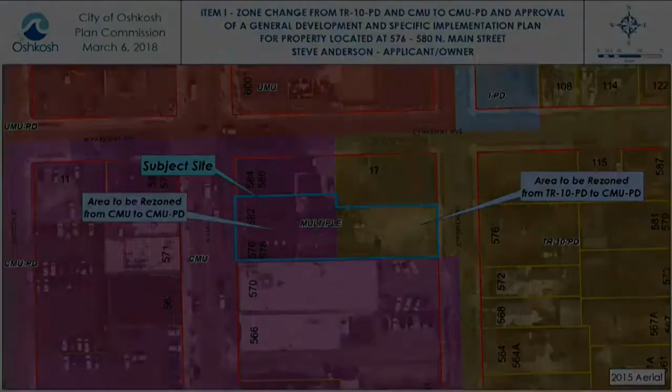Up on screen is an existing zoning map. Let me give you a little background information first. The subject property is about 1/3 of an acre in size, located mid-block of the 500 blocks of North Main Street and Jefferson Street. The property has double frontage on Main and Jefferson, and is approximately 60 feet south of East Parkway. The property is split zoned with TR10 PD and central mixed use, with TR10 on the east side and CMU on the west side.

The property contains two-story buildings which were built in the late 1800s and early 1900s. Moving on to the next slide. The buildings are currently used for commercial uses on the first floors, and office and storage spaces and two housing units on the second floors.

The east side of the lot is a gravelled area that fronts along Jefferson Street. The area was formerly the location of a two-family house which was razed in 1979, based on city records. No new use was ever established or approved by the city, so the property has been unofficially used as a gravel parking lot since at least 1994, the earliest digital aerial photography we have available.

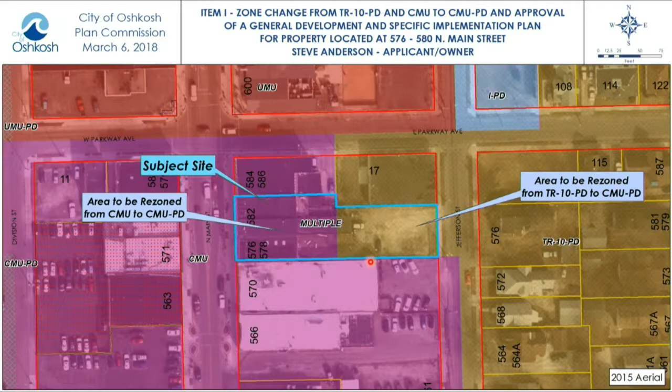The lot was to serve the two residential units, as well as provide parking for the commercial spaces fronting on North Main Street. At that time, the property consisted of 3 independent parcels, and as a condition of approval, the lots were combined into one, and that's how the split zone parcel came about. Usually that would have been caught at that time, but for whatever reason it was missed during review. Unfortunately, the parking lot was not constructed, and the property was sold to its current owner in late 2011.

Unfortunately, his plans never went forward with the development of the residential uses and the parking lot, so the gravel parking lot still remains as is, which is why the petitioner is coming back before us again today as a separate item, item 2. The applicant is applying for a certified survey map to split off the 578 building from the rest of the parcel, which will involve a subdivision variance, but I'll get into that a little later.

The parking lot is proposed to be a 16-stall parking lot with access off to Jefferson Street. It's going to serve the 2 existing residential units at 578 North Main, and accommodate spaces for the commercial units at the lower level of both buildings.

Lots are located with a 0-foot setback along the north and south lot lines, with parking stalls configured perpendicular to the lot lines. The petitioner is proposing a small amount of green space, about 10% of the lot area, here and alongside Jefferson Street.

The 4 westernmost stalls on the south side are going to be designated for the proposed lot for the CSM. Two parking spaces are required for the residential use, and two will be available for whatever commercial use is occurring on the first floor of that building.

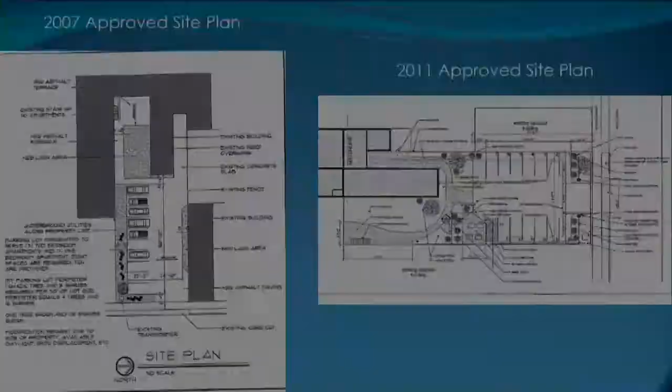The current access to the gravel lot off of Jefferson Street is located at the northeast corner of the property. Looking at the site plan, it's proposed to centrally locate that access with a 32-foot wide opening at the property line.

The design of the lot is constrained due to the narrowness of the lot. It's only 60 feet wide, so a number of base standard modifications are going to be required for this parking lot in order for it to be approved.

First, the proposed asphalt is going to have a 0-foot setback along the north and south property lines, where a 5-foot setback is required in the CMU district. So we are recommending approval of a 0-foot side yard setback for the parking area.

Another item that's just impractical for placement is a dedicated pedestrian walk leading from the building out to Jefferson Street. There's no practical location for that requirement, so staff is in support of another base standard modification for the elimination of that requirement.

Again, this relates to the 0-foot setback along the north and south lot lines, where normally perimeter parking lot landscaping would be required, but there's obviously no room, so staff is in support of a base standard modification for the elimination of the perimeter parking lot landscaping.

Another thing to note with the parking lot is the screening requirement. That's currently met with a 6-foot tall solid fence along the south lot line. To the north, there's an existing building fronting on Parkway Avenue with a 0-foot setback, which adequately screens the parking lot, so the screening requirement is met.

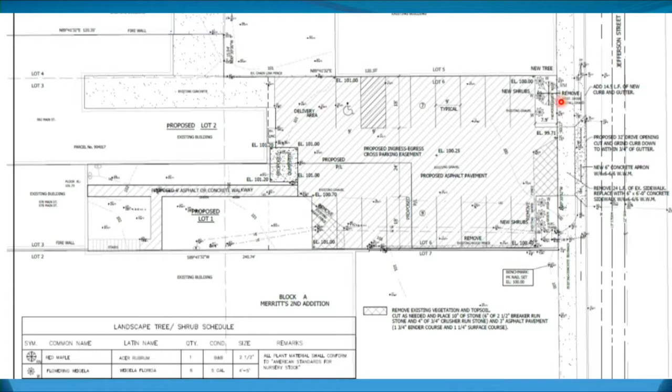As far as building elevations, no changes are being proposed for the building elevations. So with that, staff feels that the proposed plan development is compatible with the existing development surrounding the area, the Central Business District, and is recommending approval of the zone change and the GDP and SIP plans with a number of conditions.

We're recommending approval of the zone change from the TR10 PD and CMU to the CMU PD as requested. And then for item 2, this is the plan development amendment and the general development plan and specific implementation plan approval.

We are recommending approval with several conditions. Number one are the base standard modifications, which I described during the presentation. And then there are the other conditions that I mentioned throughout the report.

Approval of proposed certified survey map, the cross-access easement and shared parking facilities, and maintenance and management agreement for the shared dumpster enclosure. The parking lot shall include wheel stops for the northern row of parking stalls. Refuse enclosure material should match the existing perimeter fencing on-site. And then stormwater and grading plans be submitted and approved by the Department of Public Works.

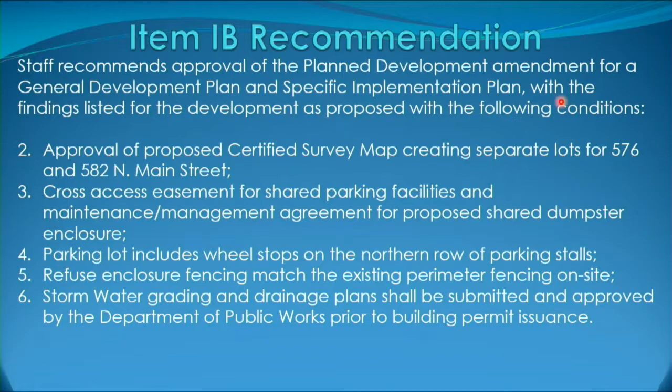All right, thank you, sir. Technical questions on that rather long item? Okay, seeing none. Anyone here from the audience to speak to this item today?

My name is Robert Tollefson. I'm an engineer with Harrison Associates. I'm here on behalf of Steve Anderson, who is the owner of the two parcels. He runs the tattoo company at 576 Main Street.

The reason we're here is because back in 2011 or whenever it was when Steve bought the property, he thought he'd be able to find tenants for the north building and be able to rent that out while he was running his tattoo shop. What he's finding out is it's a little more difficult than he had thought. He wants to get away from that and just concentrate on his tattoo business.

So he wants to sell the 582 parcel, and to be able to do that, he needs to do the certified survey map, which then led to the city staff requesting that we go through the rezoning because we had mixed zoning on there, and we want to get the one zoning, and then also going through the site plan process with the new parking and everything that's going to be for both those buildings. So that's basically why we're here, and they did a good job explaining all the different things that we need here.

So are you good with the conditions that were proposed? Yes, those are perfectly fine. Any questions for the petitioner as long as he's up? Thank you, sir.

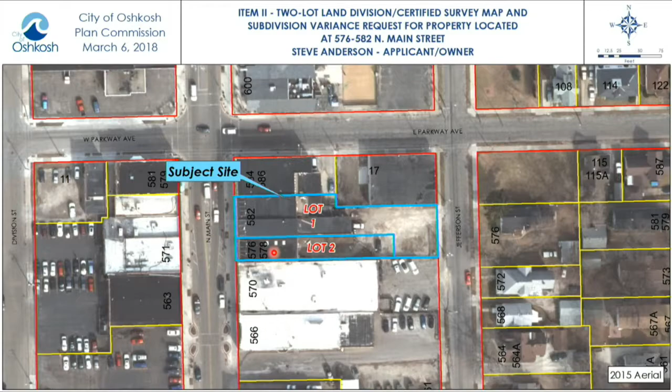So with that, staff is recommending approval of the proposed 2-lot CSM and subdivision regulations variance for the creation of a parcel width of 30 feet at the building setback line, with some conditions.

That the approved zone change to the subject site is made to CMUPD, which you recommended for approval in item 1. The owner shall provide verification that the common wall between 576 and 582 North Main Streets is fire rated, and that all public and private utilities shall be shown on the final certified survey map.

All right, thank you, sir. Technical questions from the commission? Seeing none, anyone here from the public to speak to this item today?

Robert Tollefson with Harrison Associates in Appleton. Basically, these parcels were separate parcels when the buildings were built. Don't know why they were combined, but now we're resplitting them so Steve can sell off the north lot here. I've looked at it, and there are firewalls between each of the building sections, so there's no issues with that.

And we verified with Public Works that there are separate sanitary and water laterals to each of the buildings, so there's no issues with that. We'll get the gas and electric easements put on the CSM, because basically they were shared between the 2 properties when they brought the service in, but those services were brought in when those were separate properties at that time. We'll get those put on, so we don't have any issues with any of the other stuff. I think we're good to go with it.

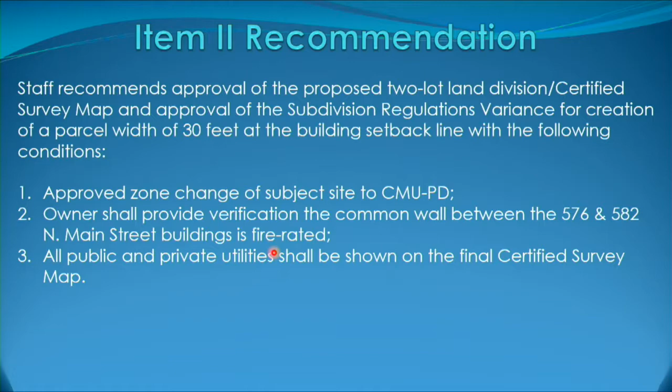Mr. Chair, the Assistant Director of Public Works, Steve Godey, asked me to modify condition number 3, or would you rather have it as a separate condition? It should be noted that if there is only one water service servicing both buildings, one of the buildings will have to acquire its own water service. That should be added as a condition.

All right, back to the commission for discussion. This is with that condition added, the modification of the third condition. All right, anything else? All right, call the roll.

Weigert, aye. Harry, aye. Mott, aye. Crop, aye. Bowen, aye. Cummings, aye. Ford, aye. Kiefer, aye. Wojtek, aye. Motion carried, 9-0.

Moving on to item number 3, a conditional use permit request for a personal storage facility at 538 West 11th Avenue. Thank you, Mr. Chairman. Welcome, sir.

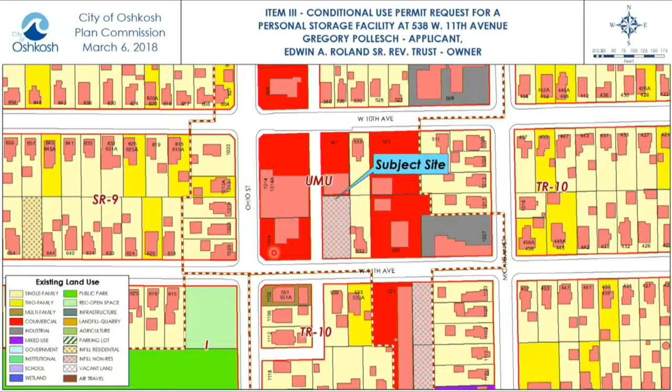Here's the subject site. It is a vacant parcel located on the north side of West 11th Avenue, about 150 feet east of Ohio Street. It is about a quarter acre in size, zoned urban mixed-use district, and the surrounding area is a mixture of commercial and residential uses. Here's an aerial view of the subject site.

The applicant is proposing a personal storage facility at the site. A personal storage facility is a conditional use in the UMU district. Staff believes the proposed use is compatible with existing uses in the area, and the facility is expected to generate very little traffic to the site.

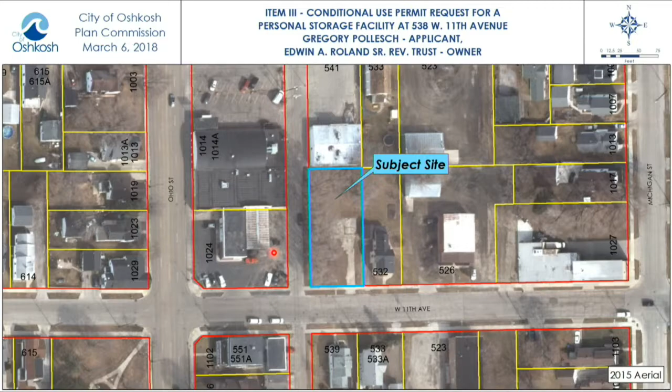Here is the site plan. The proposed building will be 46 feet by 42 feet in size. It will meet setbacks and impervious surface requirements for the UMU district. Access to the site will be a Class 2 entrance from West 11th Avenue. Vehicles will need to back into the street from the site, but that is permitted as West 11th Avenue is classified as a local street.

It is expected to have no employees, and therefore no designated parking areas are required. However, there will be driveway access to the garage door that will serve as short-term parking for customers. Lighting and signage plans were not submitted. Any future signage could be addressed under a separate permit, and lighting will be addressed during the site plan review process. The site plan shows a combination of new and existing trees and shrubs, and it will meet landscaping requirements for the site.

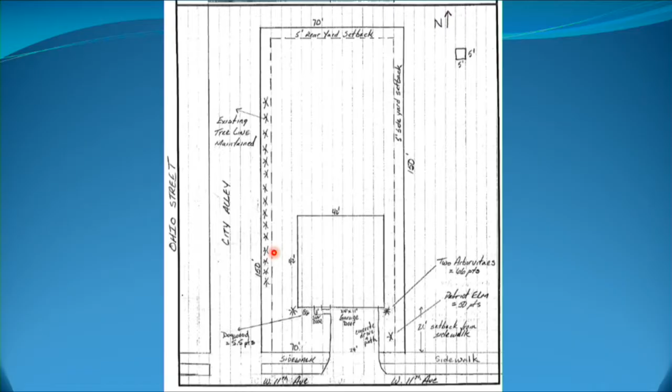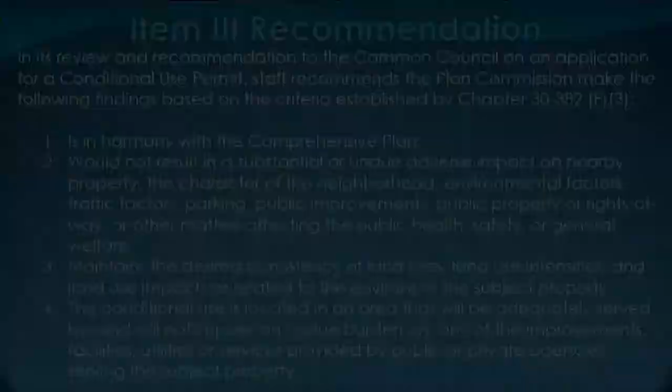All right, thank you. Technical questions from the commission? Seeing none, anyone here from the public to speak to this item today? Come on up, sir.

Greg Polash, 82 East Waka. I am the applicant, and I'm pretty much here to ask for your support, and if there's any questions, I'm happy to try and answer them. One comment: there's a reference to customers. I don't anticipate there being any customers, as we intend to use it for our personal storage needs.

Any questions from the commission? Go ahead, Kath. Will the back half of the property remain green? Yes, it currently is, and we'll maintain that. Any other questions for the commissioners? Thank you, sir. All right.

Anyone else here to speak to this item today? Come on up, ma'am. I'm here to speak on the property on 11th. I am so glad that the property has been taken. My name is Patricia A. Diener, and I talked to Ed Rowland, he's the owner. My address is 1316 Broad.

I did talk to Rowland today, and he informed me there has been some progress on it, and I told him I would come to the meeting to inform him on a few things. I'm very happy that the gentleman is going to take it. It was a toss-up between us or him, and I'm just happy the money came through so he could do it. And like the lady said in the back, is that going to be green? The whole yard is green. You've got about 2 feet from the building behind us, the laundromat, it's no longer a laundromat, and I think it'd be nice having a garage there. Okay, thank you very much, ma'am. Anyone else here to speak to this item today?

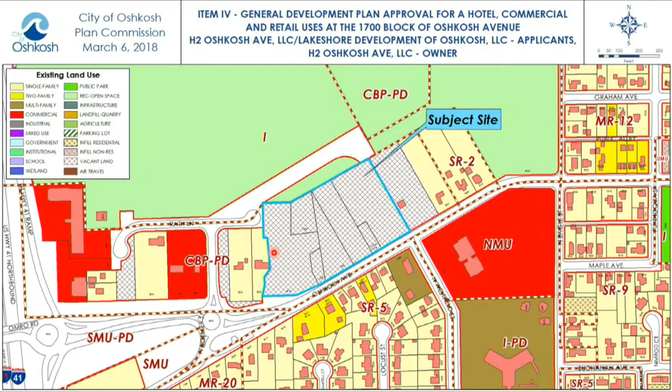Here's an area of the site. You can see we have kind of the old Robbins property, and then some of those sites have already been cleared of homes, and there are some existing homes that will be cleared as part of this project. Again, it's kind of lining up with the North Westfield Extended. This will be the section to the west side of it.

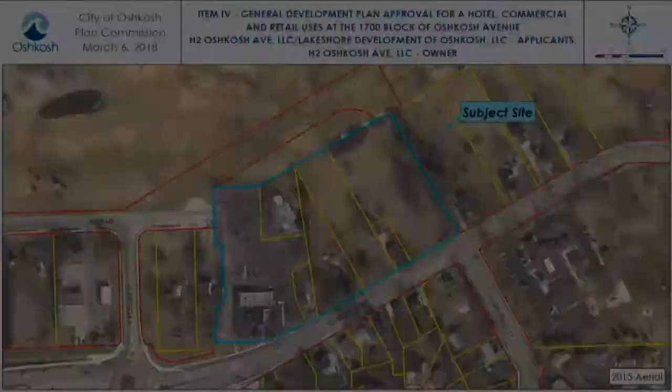So phase 1 of the development is considering a 2-lot CSM would be required. The proposed hotel lot would be subdivided off for the remainder of the retail commercial space. The applicant is proposing approximately a 112-room extended stay hotel. Staff is noticing that we will need to, during the SIP, take care of some cross-parking, cross-access, cross-signage easements, as it's intended to kind of function as a single development, even though it will be 2 parcels in nature.

Phase 2 is kind of indicated as right now approximately 5 retail buildings, showing a total of approximately 38,000 square feet. But again, this is just the conceptual GDP level. Those buildings' exact locations and types of uses could change, and they'll all have to come back through as SIPs.

The applicant is showing right now 2 access drives off of North Westfield, one servicing kind of the commercial on the front, and one servicing the hotel. Staff during the SIP will need to review the exact location of that southern access drive, as it may require an access control variance because it might not meet spacing requirements off of Oshkosh Avenue. But that final location will be done during the SIP, and we will handle it at that time.

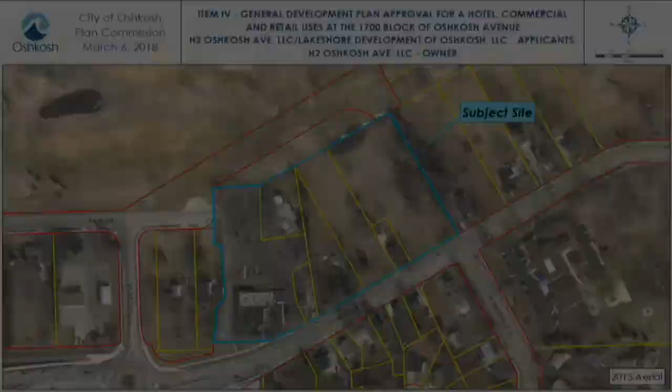The applicant is also indicating one off of the Koeller, or yet to be named, street extension. Right now that is actually shown as going through a city-owned parcel. During the CSM that created the Oshkosh Corp site and this Koeller Street extension right-of-way, an outlot was created that is still owned by the city. But we'll discuss that a little bit towards the end of this. Obviously that will have to be worked out with the city for that parcel if it is intended to go through it.

Right now the site plan indicates approximately 142 parking spaces. Staff has not run a parking calculation on the site yet because a lot of those uses are still in flux. As they SIP out the various segments of this, we will have to run each through the code. I can say right now it appears that the hotel site meets its requirement, which is per kind of the first phase of this development that you'll see as the SIP for the hotel in the future.

Again, staff is recommending that we will need some cross-access, cross-parking agreements, as this site is really functioning as a single parcel. Staff is going to recommend that there be a condition placed on it that the 2-lot CSM come forward first before we see any future developments. Also noting that there would be several base standard modifications that will need to be done as we do the SIPs, as there is quite a bit of pavement that is crossing what will be those internal property lines. So we'll have to handle some base standard modifications to take those pavement setback lines down to 0 between the retail lot and the hotel lot. But again, we'll handle that as part of the SIP process.

Stormwater management plans have not been submitted at this time. They do indicate a small conceptual stormwater management pond there. They have been in some discussions with Department of Public Works about the unique character of this area and how stormwater management is going to be handled. And I know we do have a meeting upcoming between Department of Public Works, ourselves, and the applicant's civil engineer to start to figure out exactly how stormwater is going to be handled for this area.

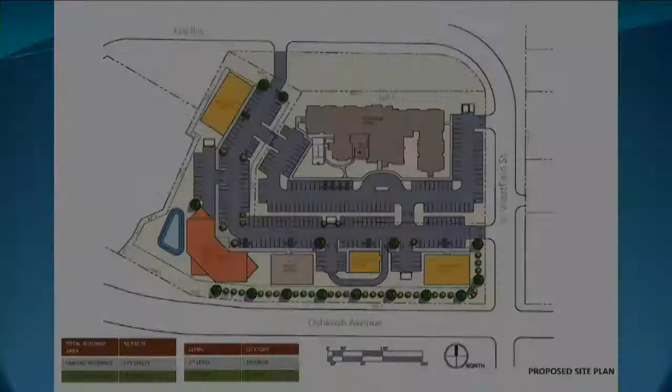Since the original plan was submitted, the TIA for Oshkosh Avenue has been finished, and Council has weighed in on what they'd like to see there. Previously, Oshkosh Avenue was a 66-foot wide right-of-way. The intent is for that to go up to 90 feet, so the city would be looking to acquire 24 additional feet of right-of-way along Oshkosh Avenue. In doing so, preliminary discussions have started about land swaps between the right-of-way needed for Oshkosh Avenue, the right-of-way needed for North Westfield Street, and that outlot shown earlier to the north side. Preliminary discussions are taking place about the applicant taking over that parcel and being made whole for the right-of-way being acquired.

This is a more recent site plan we've been provided with. Again, it's not the site plan we're technically reviewing as part of the GDP, but we wanted to make you aware that the applicant is working to massage the site a bit more as we move toward the SIP level. The hotel's been flipped 180 degrees, moved closer to both Koeller Street and Westfield Street. There are some consolidations of the buildings into fewer, larger buildings that would possibly be multi-tenant. Again, it's not the plan we're making a recommendation on today, but we wanted to keep you aware there will be additional processes coming forward, probably some land disposition if they acquire that other lot, and then the SIP for the hotel. That hotel SIP likely won't go forward until the land swap or whatever happens with that parcel is determined.

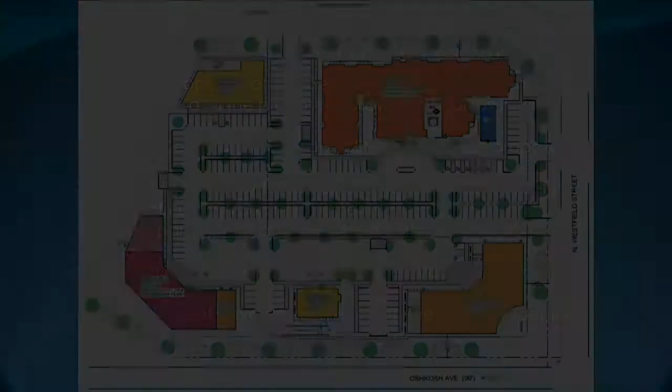So will we be doing another one? They'll be coming back for their SIP, so we'll kind of amend the GDP during the SIP process.

Staff is recommending approval of the general development plan with a couple of conditions: first, approval of a certified survey map showing that 2-lot configuration being proposed; dedication of the right-of-way for the North Westfield extension per Department of Public Works requirements; cross-access, parking, signage, and stormwater easements provided between the lots; a base standard modification to allow that joint freestanding signage concept even though it's 2 lots; and that the hotel lot shall not have independent freestanding signage.

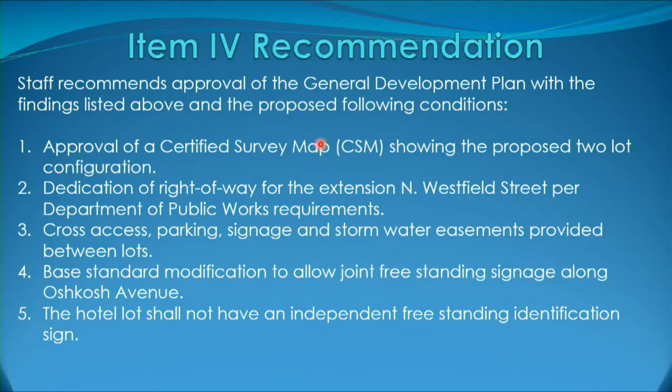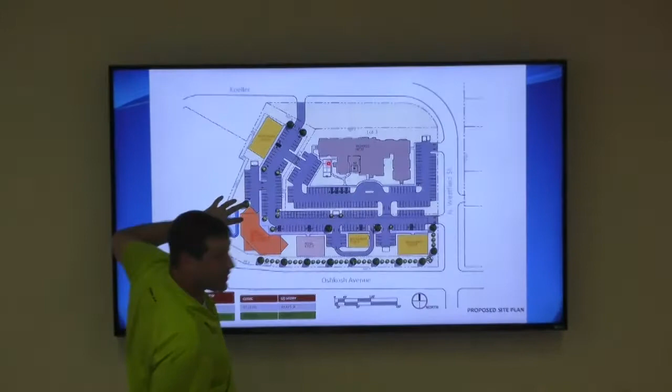Go back to the one that shows the lot lines. I found it very confusing between the 2 lots for the proposed development. Okay, so this would basically be 1 lot, and this would be the second lot. And that portion above is the city-owned property in question, created when the right-of-way in the CSM was done for North Koeller Street.

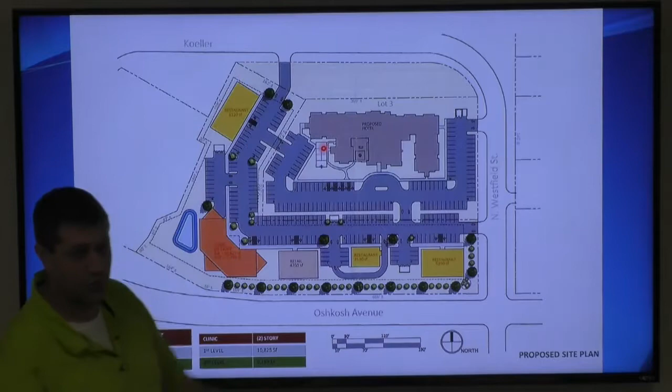I'm confused by the curve on North Westfield Street, in the upper right-hand corner. Was that something that was talked about last time? A little bit. If I can have Steve address that.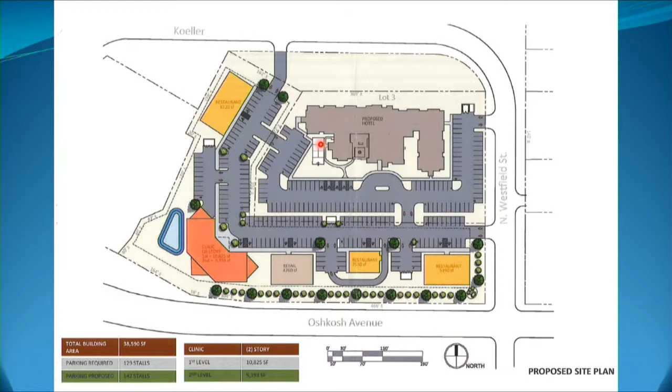If you could flip back to the diagram that shows the CSM, or the right-of-way. As you can see with the red lines near the top, the extension of Koeller Street as it comes to Westfield does have a radius on that corner. That is the intent of that road - it will be a radius, not a 90-degree turn. It will be a free-flowing turn, and Oshkosh Corporation will have a driveway off of that radius serving their parcel, so there's a distinction between the public street and the private entranceway, so vehicles heading eastbound on the extension of Koeller Street don't inadvertently enter the Oshkosh Corporation parcel thinking it's an extension of the street, at which point they'd have to try to turn around and exit that facility.

Okay, I didn't quite get all that because papers were coming through. Will this be talked about in the next item? We'll discuss it a little bit in the next item as well. As Steve said, the intent is to have a radius turn there, so Oshkosh Corp can have a driveway that comes in, so someone doesn't confuse it as part of the street.

If I'm summarizing that adequately, North Westfield as a public street will not go through all the way, closer to the lake? At this point in time, there is no intention to do that. There would be no issue - if the city should decide to do that at some point, the right-of-way would still be there. We didn't parallel the curve on the other side, so if the city at some point wanted to dedicate that and extend it, it could be done.

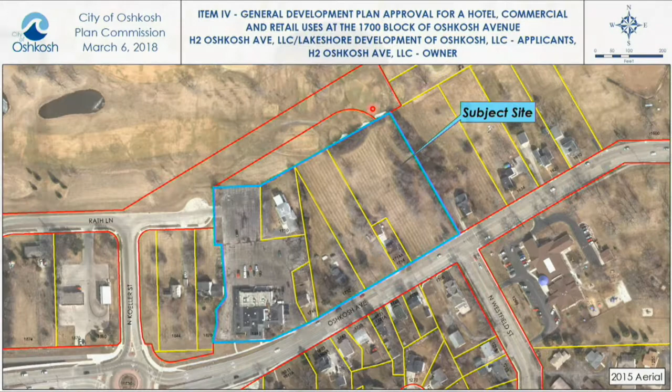One more question about the approximate acreage of the outlot, whatever that city-owned property area is, relative to whatever right-of-way on Oshkosh Ave. Want me to take that? The outlot's approximately 30,500 square feet. The total right-of-way that the city would need beyond what would be expected to be dedicated is in the 32 to 34,000 square foot range, if I remember correctly. So we'll still have a little bit of additional land that we may need to swap to make the developer whole.

Normally speaking, property owners dedicate right-of-way up to what's required. In this case, we're requiring above and beyond what would normally be expected of a developer to dedicate. Okay, all right, thank you.

So the GDP, if it's gonna be modified, I assume the reason we're passing it as is today is because of a timeline issue? It's partially the timeline and partially because there are a lot of things that will come forward in the future, and we're gonna be SIPing this kind of one step at a time. This lays the groundwork so they can start to do those finalized plans. Fair enough. Other technical questions?

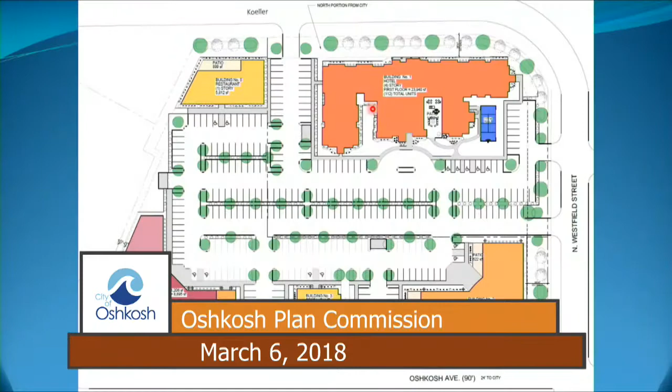Location of the detention basin, on the revised figure? Again, they don't have one shown. They're looking at maybe some options - Steve is here, there's still a lot of stuff up in the air of how that is going to be done. They may be looking at some within the parking lot. The city is considering, and Steve is looking at some regional stormwater management options here - a full stormwater pond, as you traditionally see in maybe a single lot development, is probably not going to be needed. As the TIF was proposed and approved, it requires these developments to manage their water quality element only, and the city will be taking care of the water quantity element at a different location, either by direct piping it out or a detention basin.

This is something else that, as we unfold this, is one of the things we kind of had to address. We had to wait for the TIA to finish to make some of those determinations of what was going to need to be done. Now that that's been done, the developers can start finalizing those plans of how it's going to take place.

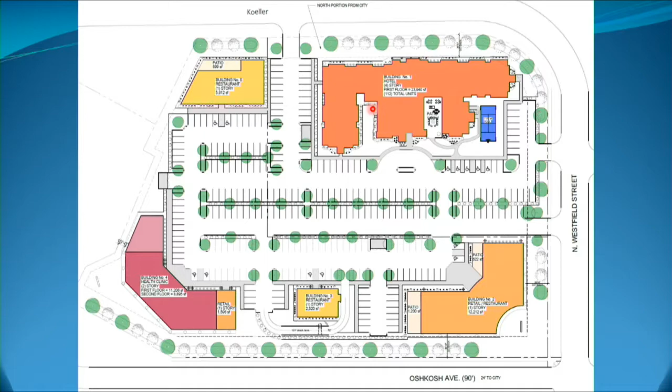Other technical questions? Mayor Cummings? Just one question, assuming North Westfield will continue to be the entrance to Oshkosh Corp, has anyone talked to Oshkosh Corp about signage needs on that northwest corner?

I think actually Oshkosh Corp's primary entrance is going to be the roundabout over at Koeller that will be extending up. They envision that, and we'll talk about it when we get to the Oshkosh Corp site. Their employee numbers show that the majority of their traffic is going to be coming off of 41, likely going through the roundabout, the North Koeller extension, and into their property.

Other technical questions? Excellent. Anyone here from the public to speak to this item today? Come on up, Steve.

Steve Hoopman, 5105 Iameda. We're the property developer, and Ben Ganther is with me from Ganther Construction, who has a rendering of what the hotel as proposed kind of would look like. So we're here to answer any of your questions.

The handouts I did give you show some additional commercial buildings, and those are just kind of concepts of what the front buildings could look like. It's all up in the air at this point, depending on who ends up in there and if we end up with a clinic or not, and the type of fast food locations that might go in there.

So the big thing is getting the hotel under construction and getting it to a point where we can get the SIP ready to submit within the next 30 days or so, which would have the stormwater management plan along with it.

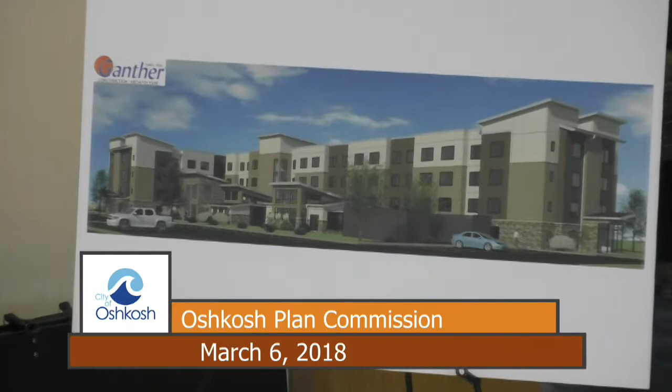So this is their 8th or 9th generation of the Marriott Residence Inn. There are a number of them that exist throughout the country, and we've just kind of modified and tweaked it a little bit to meet the new building requirements.

It definitely adds at least $500,000, if not more, in cost to the project, making it 75% Class 1 material. Instead of, on the top part, doing an EIFS, which is a cement board, we're having to bring the brick up further up the sides, and some stone on the front, and then some brick.

But this kind of creates a little bit of a problem, because at the main entrance the brick doesn't actually start till the second floor, where normally it would be EIFS. But with brick starting on the second floor, we're gonna have to do some additional steel work with posts and beams to support the weight of the brick and so forth.

So the building requirements definitely do add to the cost. On a single story or story and a half building, it's not as bad, because you're not dealing with as much vertical height, but in this particular case it does. This one, I believe, shows pretty much 75% on the 360 design.

So I don't know if there are any questions or not, but the top material here is a product by a company called Allura. It is a cement panel that rests between extruded aluminum strips that create that rustification strip that you see segmenting that upper material.

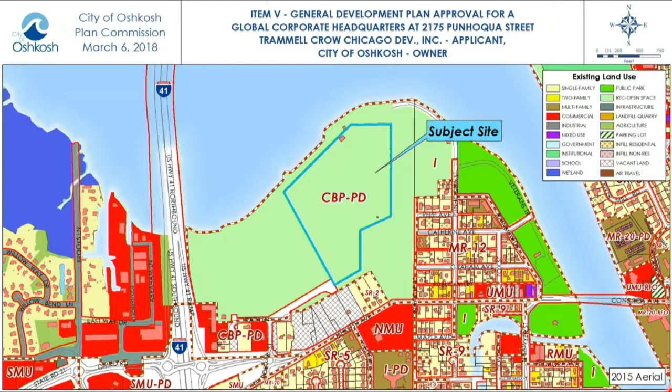Here we have the aerial showing the area that has been subdivided out through CSM for the Oshkosh Corp Global Headquarters. It has approximately an 80-foot wide right-of-way strip along the new North Westfield, North Koeller extended intersection. Oshkosh Corporation is intending to construct an approximately 189,000 square foot global headquarters, which would employ possibly up to 650 people on the location. The building is a mixture of office space, conference room, atrium, training center, some cafes - a lot of amenities they're trying to add for their employees - as well as the associated surface parking lot.

Here's the rough landscape plan. Right now they are looking at just one main entrance along the northwest field, North Kohler Street extended. It's approximately a 39-foot wide driveway, which will include one drive lane entrance in and two drive lanes on the way out. Here you can see the large, approximately 650 parking space parking lot intended for the site.

Moving through, here's a rough signage plan. Obviously this will require a SIP as well, but they're indicating wall signage on the north and south sides of the building. That sign area right now, they're reserving approximately 416 square feet of space for each of those signs.

Final signage plans have not been determined, so they're just trying to throw some placeholders out there. On the north side of the building, we have about 432 linear feet of building, so their maximum allowed signage is 432 square feet. So the 416 square feet they show, which is just a large box, would be appropriate. On the south elevation of the building, they only have about 328 feet of building frontage, so that sign will either need to be scaled back to meet the maximum sign requirement, or they could seek a base standard modification once final signage plans are made.

They are indicating 5 outdoor display areas on the site. Now, when the Corporate Business Park Zoning District was established, outdoor display is not permitted, so they will need to do a base standard modification for their vehicle display areas.

In your staff report, they did outline 6 points about the intended use of how they want to do this. Instead of reading them one by one, I'll let you look through them, but just to highlight briefly, these are intended to have vehicles come and go, not be permanent outdoor displays. If they have a vehicle, they may display it for a while — if there's a certain client coming into town that might purchase that type of vehicle, they may have that out there for a little while.

They're intended to be landscaped, formed features — not your outdoor display like you see at a gas station. These are intended to be vehicle display areas, maybe 1 or 2 vehicles at a time on each of these sites. The final details are still being worked out exactly how they want to use them, but they're looking at grasscrete, so these aren't going to be large concrete areas where they just park a vehicle. The intention is for them to look blended into the site, and there would obviously be no retail sales — these would just be vehicles they're displaying that are products they make.

So staff is generally supportive of that base standard modification, but we'll handle it during the SIP once the final details are worked out of exactly how they intend to use these areas.

In terms of landscaping, we have a very large site with a lot of landscaping requirements. The applicant is still finalizing those plans, but they've indicated three areas where base standard modifications may be sought at the SIP level.

The first is the primary entrance to the building. Our landscaping code requires that 50% of all landscaping points be placed on the primary building facade—in this case, the south facade. The applicant has a large plaza area and landform features where they want to use the vehicle display, and they can't achieve 50% of their points along that facade because it's taking up other elements. They still intend to meet the full requirement of points, but would seek a base standard modification to move those bushes around the rest of the building and landscape in front where they can. That'll be handled at SIP, but they've indicated this is one area where they may not meet the code for location.

The second is our yard landscaping requirement. In the new code, 50% of yard landscaping must be along street frontage. In this case, based on the size of the development, they're required to have 3,800 points of yard landscaping, but they only have an 80-foot wide strip of actual street frontage, primarily made up of that drive entrance. It's hard to fit 1,900 points—half of the total—into that little area. So they want to meet the yard landscaping requirement in total points, but given the unique configuration of the lot, it's not feasible to put it all in that area, so they want to spread it out more throughout the site.

Finally, we'll move forward here. Conceptual building elevations have been provided, and they're actually pretty close to having those finalized.

Here's where I talked about the signage—right now they just have placeholders on the building as those sign plans are finalized. At the time the GDP submittal was done, they were at 74.2% of Class 1 materials, just below the 75% requirement. We've talked with the applicant, and they will get that up to 75% by SIP. They've made those submittals—I haven't had time to review the documents, but I know they've indicated they'll meet that 75% requirement of Class 1 materials on all four sides of the building.

And here you can kind of see rough examples of what they're looking at for their vehicle display.

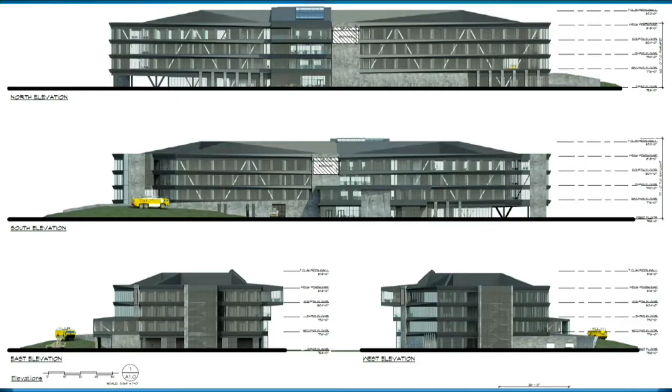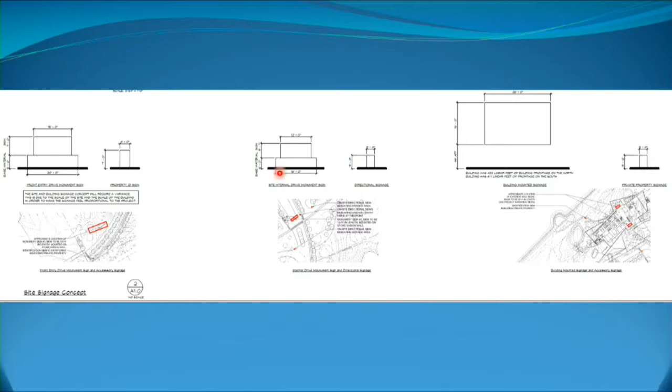These are just conceptual images showing where the possible freestanding signs could be located and their approximate sizes. They're looking at a slightly larger sign out toward the street entrance, and possibly a smaller monument sign as you get into that parking area.

Staff is recommending approval of the Jelly Mill Development Plan. We understand there are a lot of things still to be finalized during the SIP process, and a lot of those we'll handle during that process.

Thank you, sir. Technical question, Kathy? As usual. Go back to the site plan with the—not that, the pretty one, with the— That one, right, yeah, that one.

To the, that's a driveway or parking area, going up into this building - is that where the trucks can access? Like the, I don't want to say loading dock, but delivery dock area is here. So that darker portion would indicate the delivery area.

That's the interior of the building, sort of. Correct, and I think we'll have the applicant discuss, but there may be an entry point here for some vehicles, because they're proposing a museum atrium area inside the building that'll only have access to get those types of things into the building.

Okay, and then these vehicle display areas would be on that grassy area to either side of the plaza. They show 5 of them - one here out in front of the building, broken into 2 sections, one here, one potentially here, one in this median that separates the parking, and one down possibly by the entrance where you come in.

So we can go back to the landscape plan. Potentially one down in this area.

I don't know if this was talked about in workshop last time, but when it comes back for final, we can talk more about landscaping and this blending idea that they have, because right now in the materials we got, it looks a bit stark. I would say during the SIP there'll definitely be some conditions placed on this related to that use.

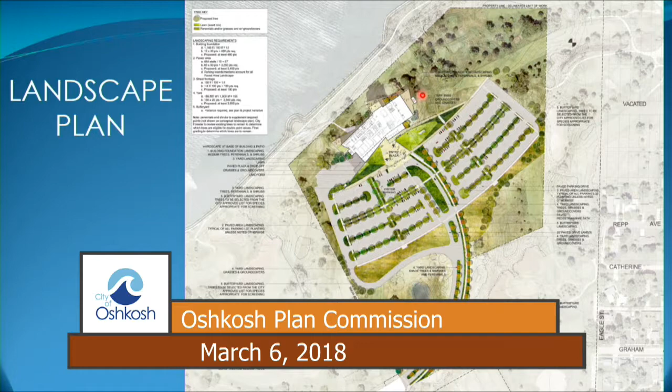And so no display areas are planned on the lake frontage of the building. The closest ones are, they're showing one here and one here, sort of on the edge of the building. If we go to that drawing for you, you can see the 2 - one adjacent to the east side of the building, and one to the west side of the building over here.

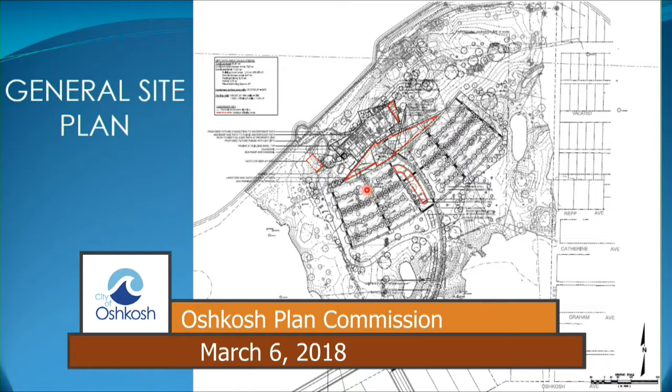And again, I'm sure the plan commission talked about some of these interesting features like these rock walls, called the site wall. Looks to me like it's rocks carefully placed in chicken wire. There is a wire mesh. Is that right? Because that does not appeal to me. Some of the comments we're looking for are to see what the plan commission's opinion of that type of use is.

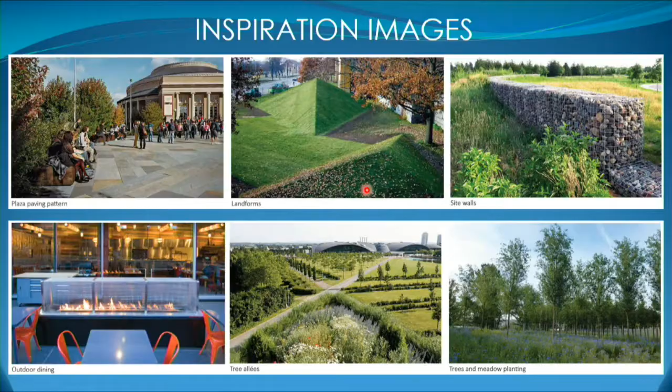When we did the workshop, once we got the internet connected without Jeff here, the images that were shown to us from Milwaukee looked better than what we're seeing here. Yeah, in their rendering, if we can go back to it - you really couldn't see the netting so well. In this folder is the rendering example of what that could be. I don't know if that image is necessarily the best, and we can have the applicant address it, but this is one of those site walls they're discussing trying to use.

My objection is the chicken wire part of it, and I'm being crude when I say that. Okay, that's all I have right now. Other technical questions from Commissioners?

Go ahead, Ed. This is probably, maybe it's for Steve, I don't know, but that drive aisle connecting to the driveway connecting to North Koeller / Westfield, how much review has that gotten from Public Works, traffic? I get a little bit of heartburn thinking that there's gonna be 600 to 700 cars trying to come out of there at 4 o'clock, 5 o'clock, whatever it is. I know it's 2 lanes, right?

Correct. So there's essentially a right-hand veer lane that's gonna go out to the roundabout, and then there's I would imagine a left-hand turn going out to Westfield. We haven't gotten a great deal of detail about that.

What we've worked out is it kind of looks like this is basically almost a T intersection the way it's showing on this image. As we've been working through the design with Oshkosh Corp and their engineers, the street will have a radius, and the driveway will essentially come out at mid-radius, forming, for lack of a better term, a Y at that point. So they'll have two drive lanes coming out where one can turn right and one can turn left onto Koeller Street or Westfield and head away from there.

And I was also interested in the rendering, whatever you want to call it, of what the lakeside will look like. Yeah, on the other one, there. Obviously, on the left, that's the public path. Correct, yes. And then there's greenery, separation between that and what's probably not intended to be a public path.

Correct. We are working with staff to determine an appropriate access point for Oshkosh Corp employees. More than likely, that would be intended for Oshkosh Corp employees to access the patio, or vice versa, leave the patio to get to the trail system. Okay, could you go back to that rendering, on the site plan, where the private area is? Yeah, so that rendering you're looking at is there.

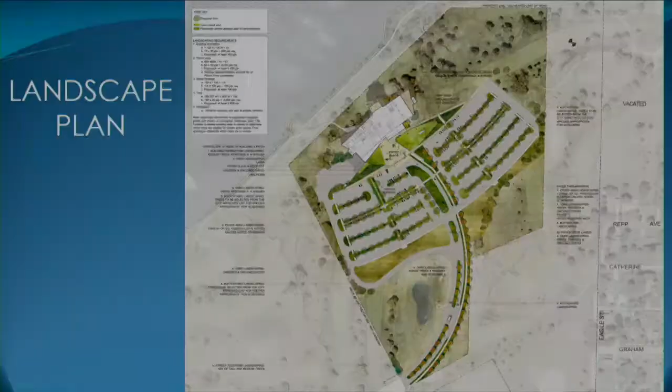Looking at the perspective from the camera, around right there, to the northeast. How would you intend to have a separation between the Oshkosh Corp property and that public space?

We are working with their security group, but a lot of it is intended as a natural buffer. There might be some small directional signage for pedestrians, similar to signage at the golf course, to let people know where those boundaries are. We might define that trail to be a little more obvious visual indicator, but a lot of it is intended just to serve as a natural buffer. Well, I like that concept.

I also appreciate the need to not have people swarming. They do have some security needs, as any office would, but they are trying to fit in with the surrounding area, and we don't want any walls or fences. I appreciate that. I agree with Kathy that a berm at that spot would be a bad idea, in terms of the view of the lake.

This looks like, and I think he said earlier, this might be natural landscaping grass. We are looking at some kind of native prairie grasses, a no-mow mix, blending that with some of the more formal landscaping as you come up the entry drive and around the building, then transitioning into a more natural landscape for the site.

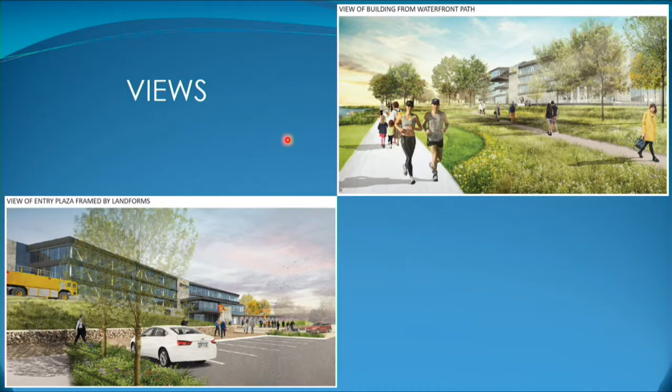If you can achieve something like that, environmental people would appreciate it. I think that will go a long way, but it would need to be appropriate native plantings. I can't tell you exactly what that planting would be today, but we have a landscape architect that can inform us, and we'll share that. That's a key piece of making this sustainable, maintainable, and practical.

Okay, thank you. Ed? One thing, just as a thought for when we're back with the SIP, which sounds like it's coming back in April. I think, because of the scale of this and the amount of material involved, it might not hurt to have a material board.

Oh yeah, absolutely. Because this is what we get in our packet. Looks good, right? Well, Darren's department can't afford a color copier, so we get this. They can't afford it, and we never really get to see it properly.

We've all talked about this before. We see sort of what a block or a stone on that building might look like, but having a material board that we can actually see what's there is going to be really, really helpful for us at our next meeting, so we'll get some of the building materials.

I'm doing your dirty work now, you don't have to ask him for it. Any other questions for petitioner? Thank you, sir. Thank you. Anybody else here to speak to this item today?

Once? Twice? All right, back to the commission. Approval. Second. Any discussion on the motion? Go ahead, Kath. I'm sorry, I'm hogging time, taking some of Jeff Tolles' time. David's not here, but David yields his time. Jeff Tolles would have left. Just kidding, David.

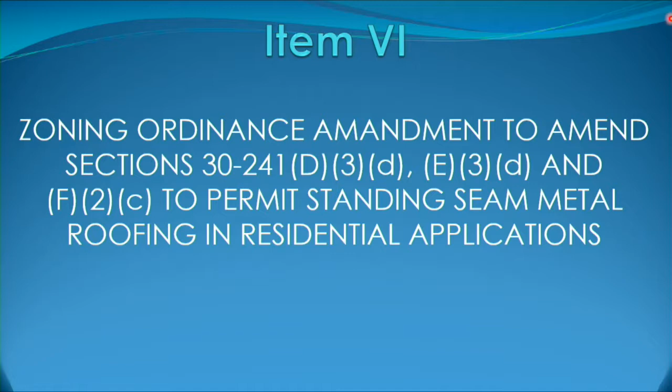Thank you, Mr. Chairman. So item 6 is a zoning ordinance amendment to the exterior building design standards, in particular to permit the installation of standing seam metal roofing for one and two family residential applications.

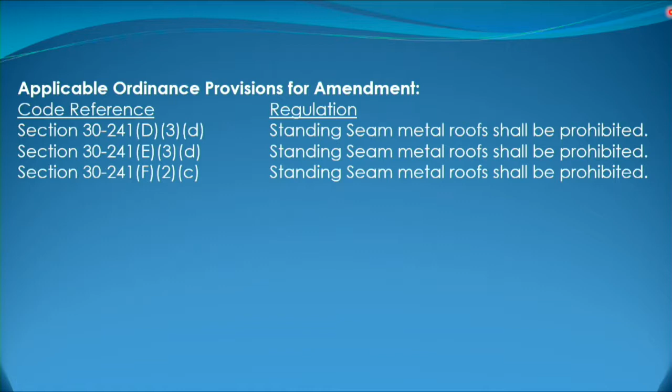These are the applicable sections in the zoning ordinance. The first one prohibits it for existing construction. The second prohibits it for infill new construction on infill sites. The third, F2C, prohibits standing seam metal roofing for new construction on non-infill sites, so new neighborhoods. We found three sections in the ordinance that currently prohibit it, and we would be looking to replace these with an ordinance that regulates but permits standing seam metal roofing.

As many of you are aware, this came to us from a couple that wants to do an energy and water efficient home on Jefferson. They have a site in an existing neighborhood, and we told them about the provisions that currently prohibit standing seam metal roofing for new construction. Rather than go for a variance, which would be an uphill battle, we thought it'd be more beneficial to look at amending the ordinance.

This came through as a workshop after the December 19th Plan Commission meeting, and then again on January 16th, not January 2nd as incorrectly stated in the staff report. We as staff met with the applicant initially.

We talked to them, researched other communities and what they allow for standing seam metal roofing, how they regulate it, issues they may have faced in regulating and permitting it, and potential issues and benefits and disadvantages that come up with allowing it in general. We put together a draft ordinance proposal that we presented to the Plan Commission on the 19th of December as a workshop.

After that meeting we gauged the atmosphere and found that many of you seemed supportive of regulating standing seam metal roofing rather than prohibiting it. We refined our ordinance draft, did more research, and came back on the 16th of January with a revised draft. After that, we revised the draft further, and we have that included in your staff reports.

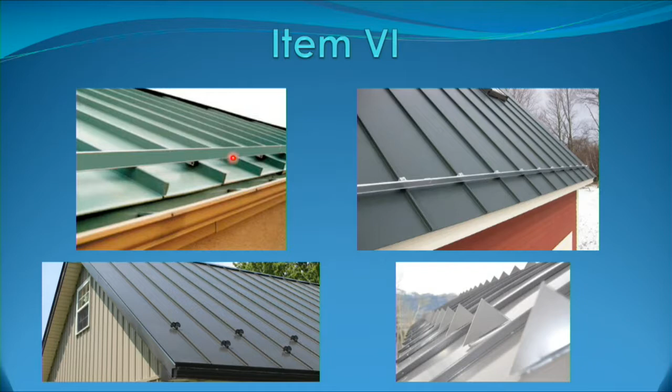Obviously we don't want a bunch of unsightly fasteners. This gives you a sense, and I think we presented these images at the last workshop, of what we'd be looking for - this one might be more appropriate, with colors consistent and actually the same in appearance. This one is again a little more intrusive visually depending on how you look at it, but at least the same color as the roofing it's installed on.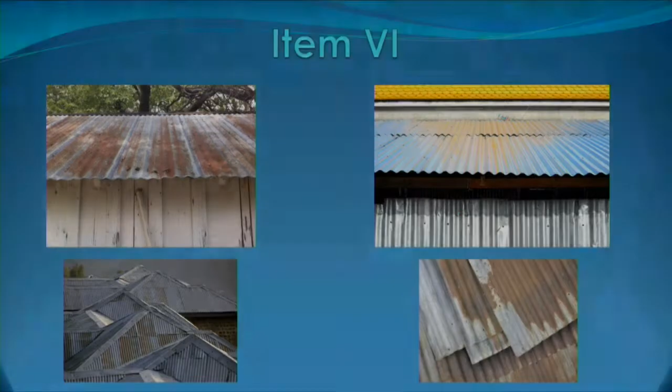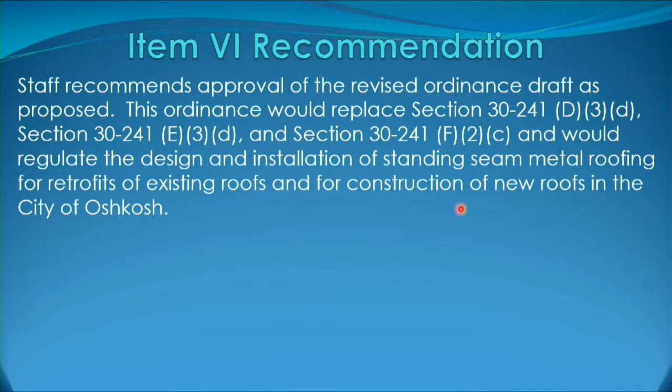I can go further into detail if anybody has questions, but the recommendation is, as I mentioned, we would repeal the three prohibitions on standing seam metal roofing and replace it with an ordinance, as you see in its draft form here at the end of the staff report, that would regulate and try to allow standing seam metal roofing, but give us a framework to regulate it with. Thank you. Technical questions?

I think I asked this before, but is there any common understanding of what a concealed fastener is versus an exposed one? The way we were looking at it, a concealed fastener you would not be able to see—you would just see the metal roofing panel. From the ground, and even from like a second floor window looking down, if it's a single story residential house. If you could see it from above, or you can see it from the street, that's how we were looking at it.

My apologies, you guys may have talked about this previously, but why is the current ordinance in place? I think, talking to Darren, there were aesthetic considerations, and then there were noise concerns too. A lot of people perhaps associate, if you're in a barn and you hear the hail hitting the roof, there's no underlayment, and there can be that pinging, a noise that people were concerned with. So it was the noise and the aesthetics.

Individual subdivision design regulations would be able to override this, I'm assuming? Covenants, private covenants—yeah, correct. They can be more restrictive, they just can't be less restrictive. Right.

Other technical questions? All right, anyone here from the audience to speak to this item today? Now's your chance. Thank you for your patience, by the way.